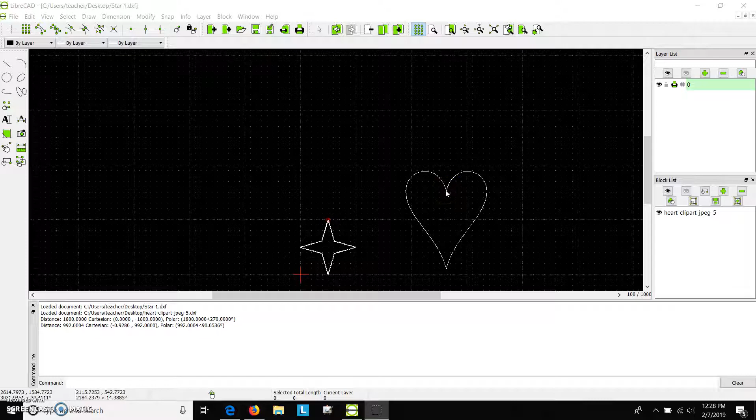Now we're going to scale this DXF drawing we brought in down so it's about the same size as this one. The first step is to measure. I'm going to grab the measurement tool and choose point to point. Right now it's free to measure from wherever it wants, and I don't have any of my snaps on.

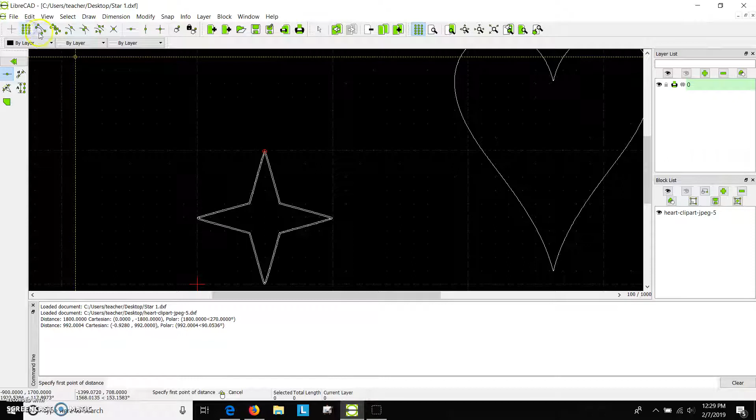I could put a grid snap on, which snaps to these little grid points, but I want to actually measure points of the actual project. So I'll choose no snaps - this doesn't have to be super perfect. I'm going to measure how tall the star is, from here all the way down to the tip of the star. Let me zoom in a bit.

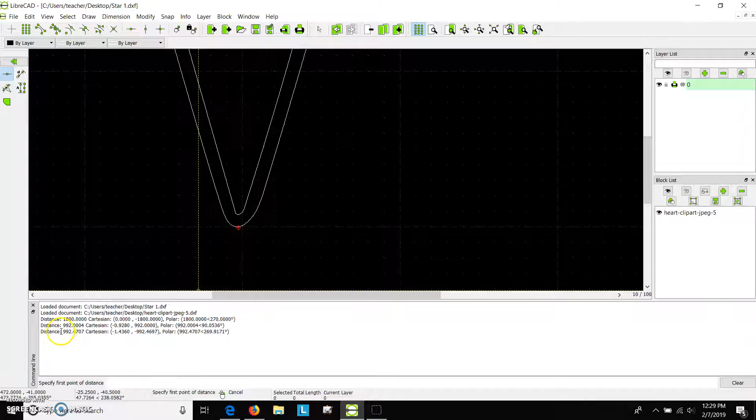We're at about 992.4707 inches. Let's call that 992.5. I'm going to write that number down so I don't forget it. 992.5.

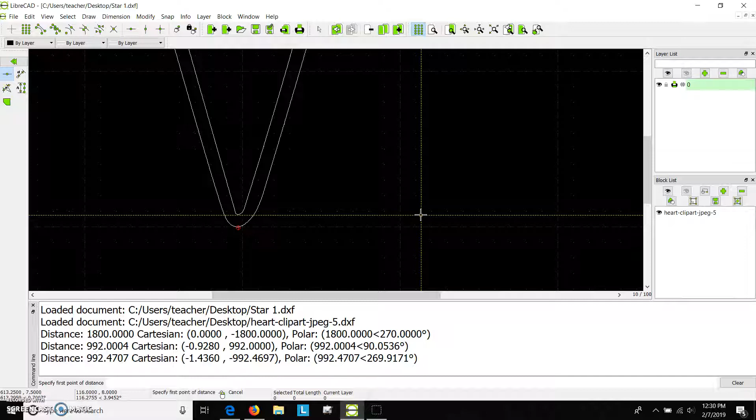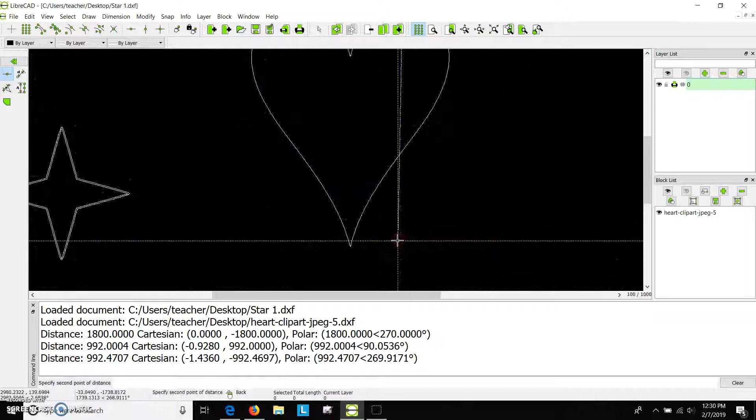Next I'm going to measure the other object, which is the heart, from the very top here. Let's get in nice and close, right about there. And I'm going to measure over this way to get a straight line going. I can force a straight line by clicking restrict vertical, and now it forces me to come down straight from that point, let's say right around there.

Now it's giving me a distance of 1779.57. I'll write that down. Let's just round it up to 1779.6. So I've got my two numbers.

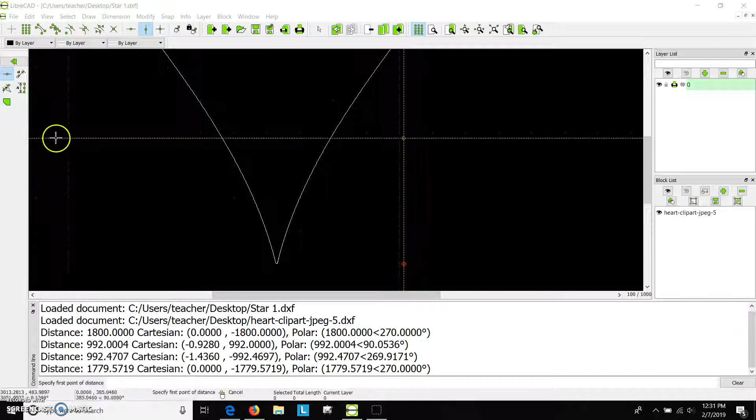Now if I want to scale down, I'm going to put the small number on top and the big number on the bottom. Let's get a calculator out. So again, small number on top if I'm scaling down: 992.5 divided by the big number 1779.6. My scale factor is 0.5577.

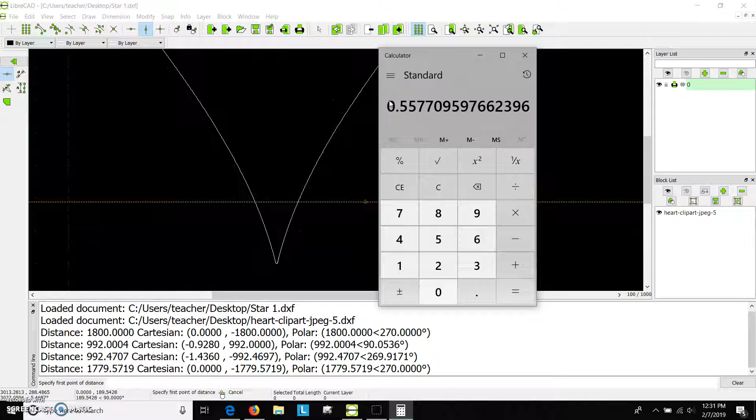I'll write that down, 0.5577. That tells me I'm going to multiply the size of the heart by 0.5577, which is going to shrink it down to almost half. Alright, so here we go, let's do some scaling like we've done in previous videos.

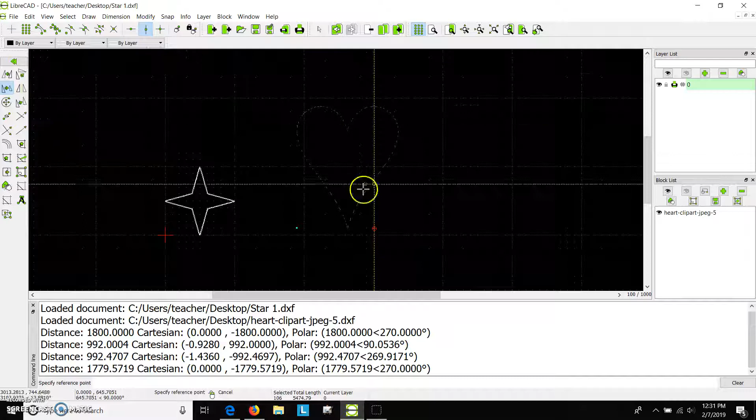I'm going to hit escape a bunch of times to clear the command I was in. And I'm going to select, modify, scale. It's asking me to specify a reference point, and I will choose the tip, snapping to it this time. There's the tip.

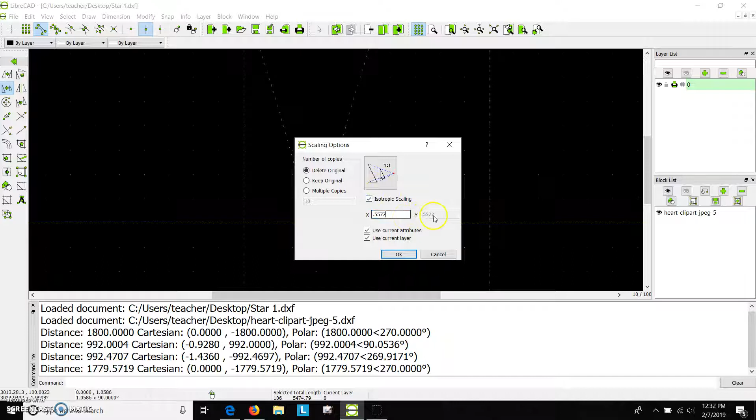Delete the original, and isotropic scaling is checked - these two are all checked. Let's put in our scale factor of 0.5577. That's going to make this shrink down in both the X and the Y by 55% pretty much. Here we go - that has shrunk down, and you can see now it's the same size.

I'm going to move it by selecting and grabbing the object. Oh, I've got my snaps stuck on. Here we go, and I've got vertical force. There we go, now we're free to go.

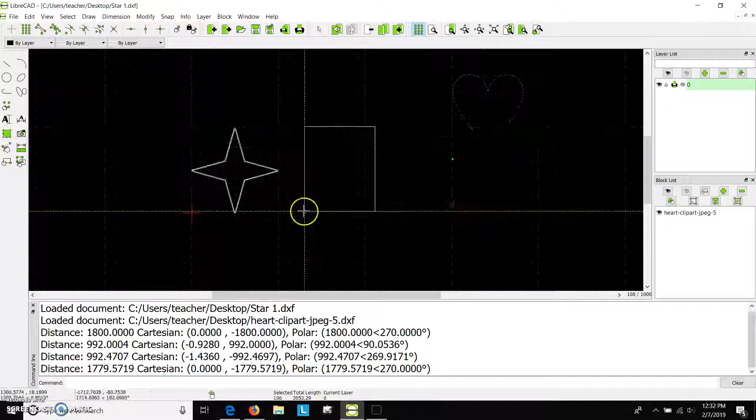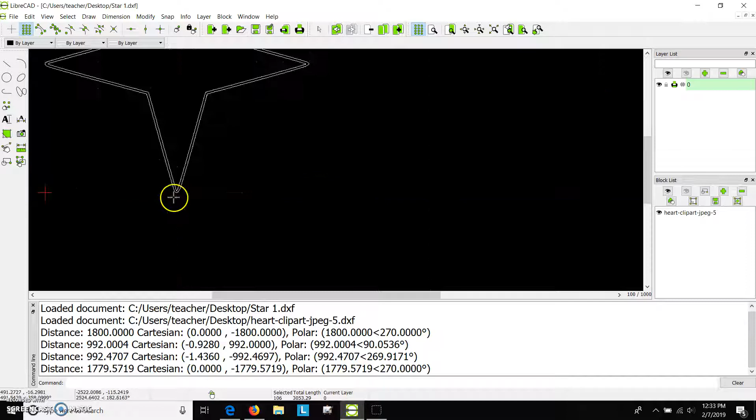Now this thing is resting right on that 0 line - there's the origin, 0,0 on a graph - this is vertically touching there on the 0 point. So I'm going to force a grid here, and you can see now I can position my next heart anywhere in line with the bottom edge. That's helpful for alignment purposes. I'm going to drop it right here. There it is. Hit escape, and I have a heart that is spaced out from the star.

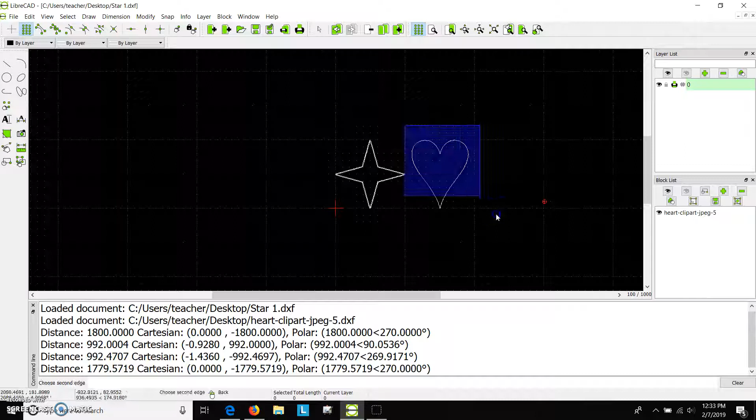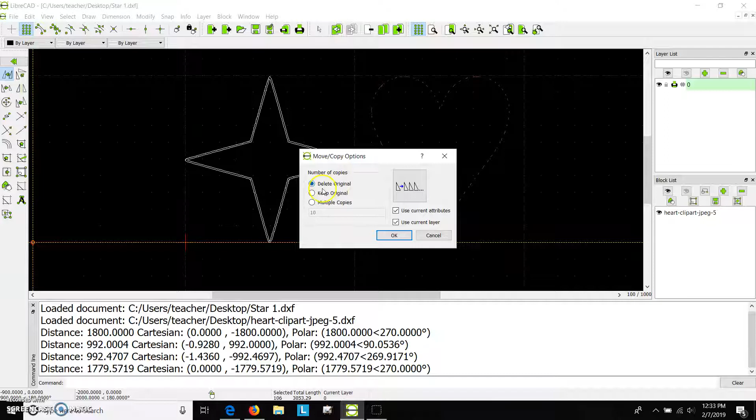And in my pattern, I want a heart, star, heart pattern. So now I'm going to copy this. Let's select it, modify, and copy. It's asking for a reference point, so I'm going to copy from the edge right here. Now it's asking for a target point - let's move it there. Do I want to delete the original? No, this time I want to keep the original, and I don't want multiple, just one. So that's good, and there we have it.

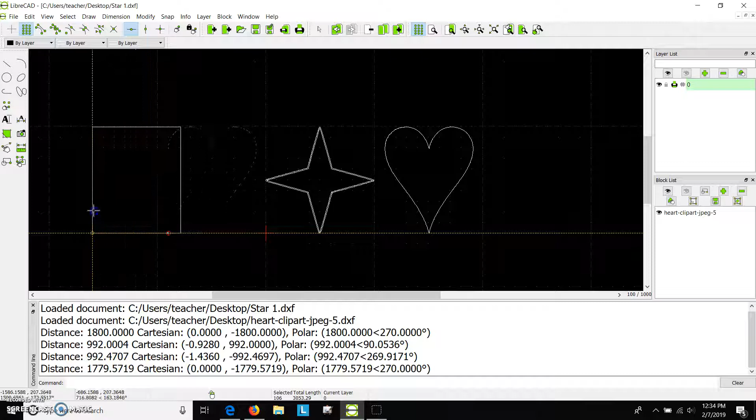If I wasn't happy with the positioning, I could move this over slightly. Remember, if you want to move it over freely, you have to turn these snaps off. Right now I can move it freely, but if I wanted to move it based on a grid, I'd have to turn a grid or some other particular snap on. Maybe I want to force it to only move horizontal and snap - now when I click this, I can only move horizontal, I can't even lift this if I wanted to. So those are helpful ways of accurately moving something over.

All right, so that is how to scale down. As a recap, you have to measure both objects, do a little bit of math when you're scaling it, and then do a move command to stamp out more.

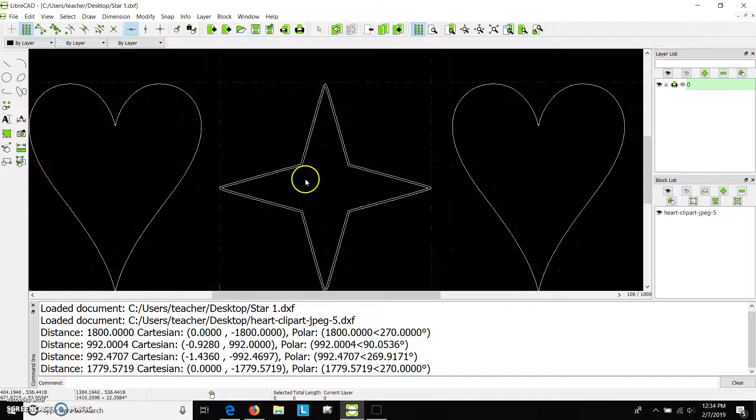Before I finish up, I'll tell you that the next video will talk about exploding and blocking. That means that this star here has two sets of lines, and that needs to be remedied. So we're going to talk about taking pieces apart and also joining pieces together in the next video. Thanks a lot.